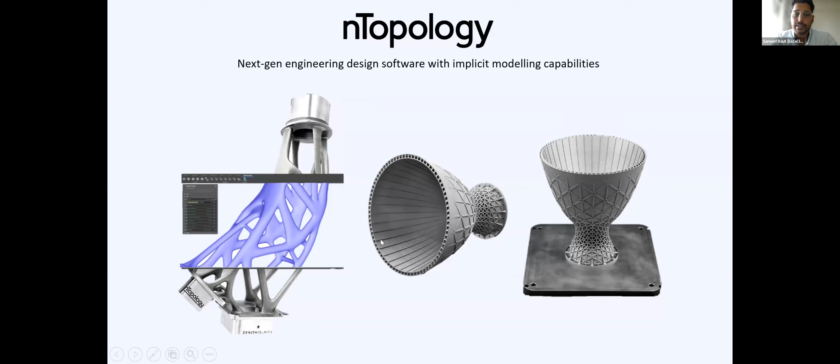Now let's jump into nTopology, which is today's topic. There was a reason for Excel3D to partner with nTopology, because we have selected a few technologies. We understood what nTopology's power is. It's a next generation engineering design software. And it is different from the current B-rep software because it works with implicit modeling capabilities. So the things which are difficult to achieve with CAD software are really controllable and very easily achievable with nTopology. We're going to see the demo of the software as well today, but I'll give you a quick glance of what nTopology is and where it has come from.

nTopology started in 2015, and they launched a platform called Element in 2016. And that's where they saw a huge potential. I've been following nTopology since 2016, when they were in the startup zone at Formnext in Germany. And from there, they have grown really drastically, with a platform today which is funded by really good companies backing nTopology. Brad is the founder of nTopology, a very good friend. And if you see the industry veterans who are from SpaceClaim or from Autodesk, whoever was in the CAD domain, they are supporting nTopology because it is something new and it is the future of how design can be made.

The mission of nTopology is to empower engineering teams to design transformative products. There are softwares in the market which can do such designs. We have seen so many parts like this, topology optimization, implants, but the way you can control it with nTopology is something which is not achievable by any other software. So these are some examples shown here as images, which are good studies.

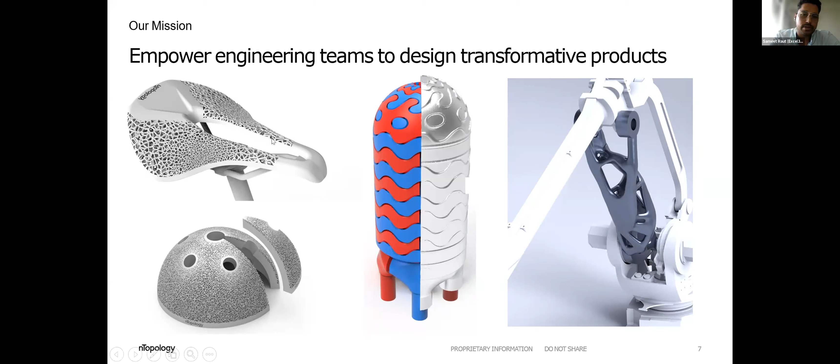Now, we all know about traditional manufacturing. 30, 40 years ago, we had traditional manufacturing, but in the last 2 decades, there was a need for something new, which is what we call additive manufacturing today. You look at computers, we had old computers, then traditional computers, and now we have multi-core GPU computers. But in traditional design software, there was a loophole. No one thought about doing something different. Everyone stuck to B-rep, but nTopology came as a platform and started thinking differently about how they can do things, and they started working with implicit modeling.

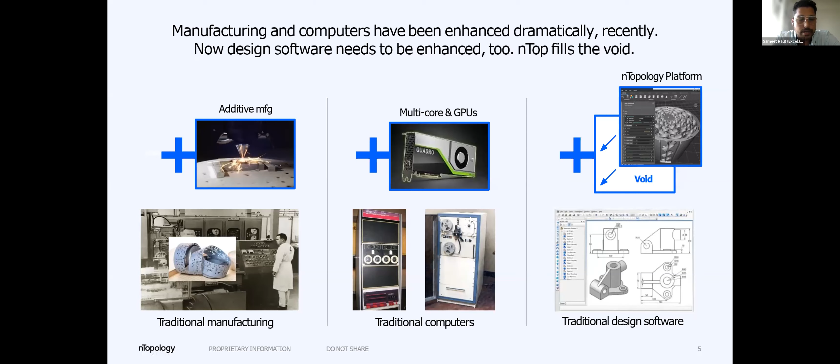Now, just a quick slide on helping you understand what an implicit model is. So you have traditional CAD software which shows boundary representations. We call it BREP, right? So you have surfaces, and a topology is actually welding those surfaces together, assuming objects are created as if they are homogeneous. And that is where we have a need for data preparation software before we go to 3D printing, to make watertight STL files for printing.

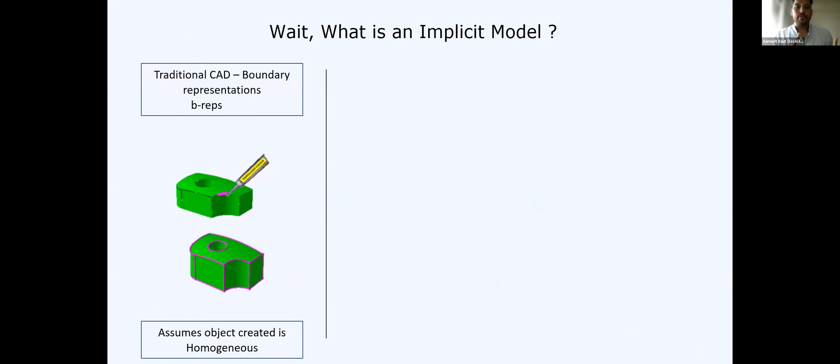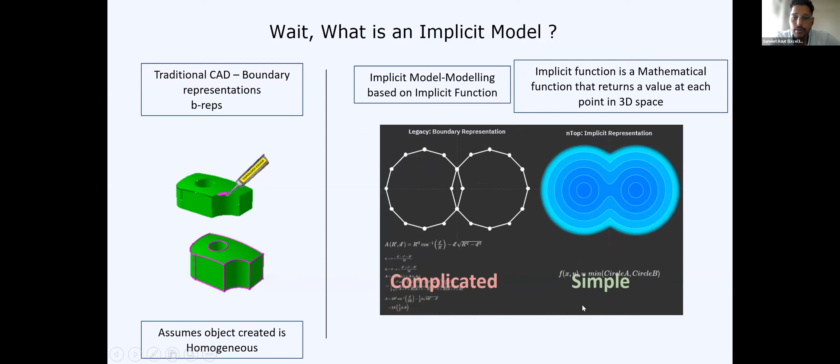And on the other side, you have the implicit modeling function in nTopology. In boundary rep, you have a sphere, it has a certain equation. With implicit representation, you also have a certain equation. An implicit function is the mathematical function which gives you the exact value of that point in the whole 3D space. Now, things become quite difficult when we do operations like a Boolean unite of these two spheres. The equations get really complicated, but it becomes much simpler and straightforward when we work with implicit representation.

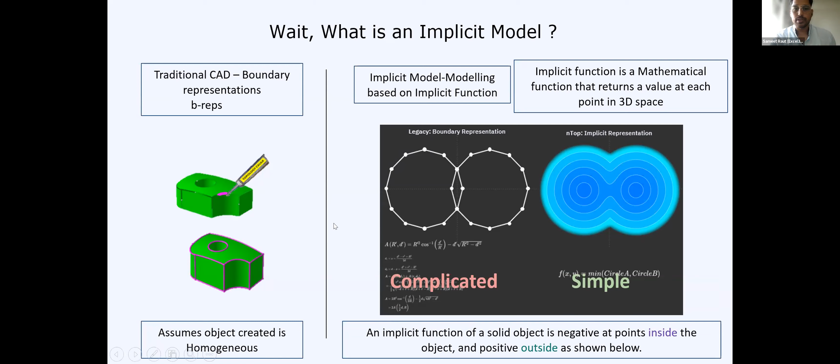So just on a theoretical note, for an implicit function of a solid object in 3D space, if the point gives a negative value, it is inside the object. If the point is outside the body, it gives you a positive value. And if it's on the body, it gives you 0. This way, you can have good control over your design, and that's where it gives you the benefit of using nTopology as an implicit model function.

So the workflow is something which might be new to a lot of people. nTopology does not work the way these CAD BREP softwares work; it has boxes which you select, and there's a workflow. That workflow you can save, and if you have a similar kind of geometry and apply a similar kind of application to it, you just have to import it and the whole workflow runs automatically to give you the part out. I think Praneeth is going to show you some of our workflows after me.

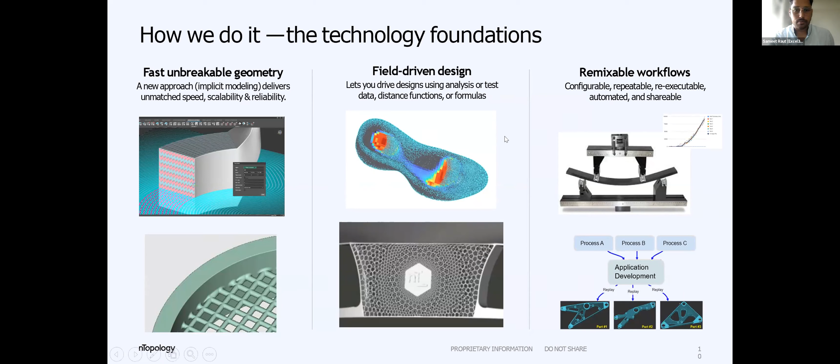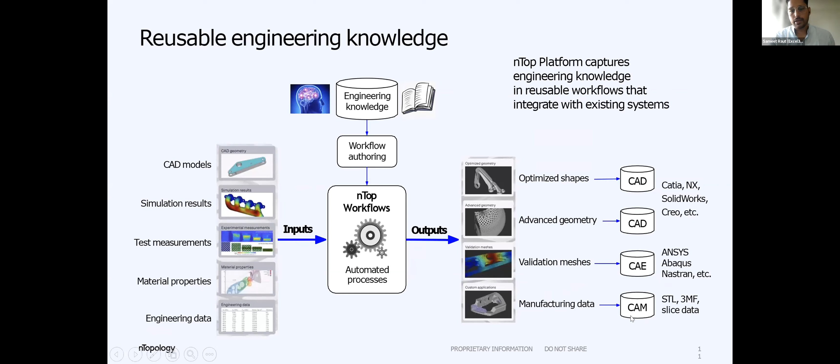Now, how does nTopology do this? It can take CAD models, simulation results, test measurements, material properties, and we apply our engineering knowledge through workflows inside nTopology, and we can get outputs like optimized shapes, advanced geometries, validation meshes, manufacturing data. So we can go from CAD to CAD, CAD to CAE, CAD to CAM as well. A lot of people ask what file formats. This slide shows what file formats can be imported from CAD, and you see we can get back to STEP and Parasolid from nTopology again, and also slice data.

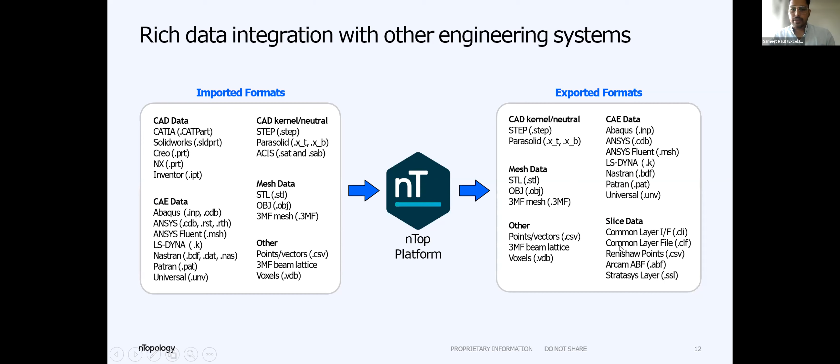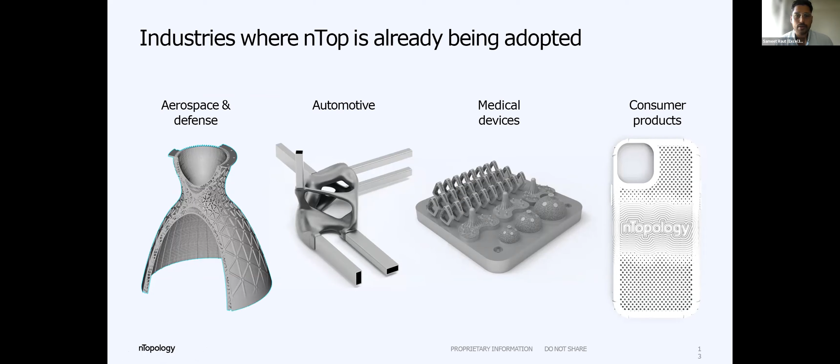Most of the industries that have adopted nTopology are aerospace and defense, automotive, medical, and consumer products. We've been partnered with nTopology for more than a year, and we have very good success stories in India, right from aerospace. Medical has shown really good successes, and we have supported a good number of medical companies on the implant design side, and automotive companies, and also service bureaus.

Application wise, today we are going to talk about how we can do topology optimization and use it. We have a use case study where we created the part, and Praneeth is going to share the whole journey. But application wise, we can do structural lightweighting, part consolidation, material reductions. We have architected materials, lattices and textures, which are easily done, and pattern making, texturing on consumer products, or even design automation.

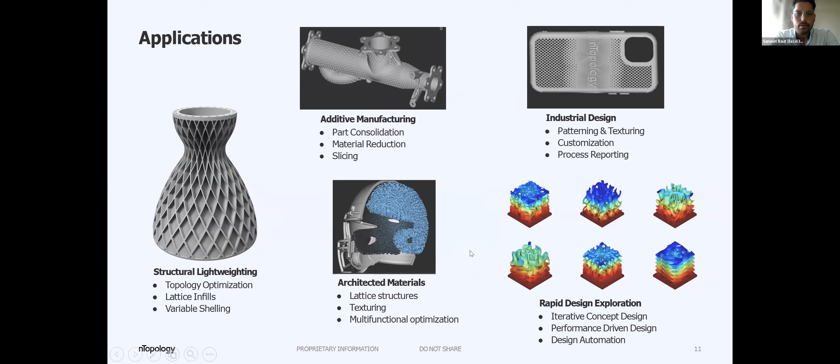Some examples: when you work on the additive manufacturing side, data becomes one of the biggest challenges, especially in the medical domain. So nTopology takes any CAD format or any STL, whatever format you put in, converts that into an implicit model, performs the operations we tell it to do, and at the end you can export it whichever way. Even if you export an STL from nTopology, it does not have to be in GBs. It could be less than 1 GB as well. We have done a lot of testing on it.

So it helps you create smaller file sizes. Also, take the example of a heat exchanger. This is one of the very good success stories for nTopology, where these designs are really difficult to make with any conventional CAD software, but with nTopology it becomes much easier, and these actually give a very good amount of performance.

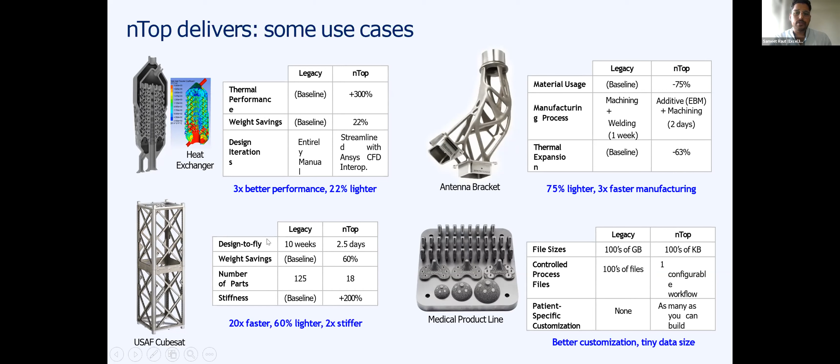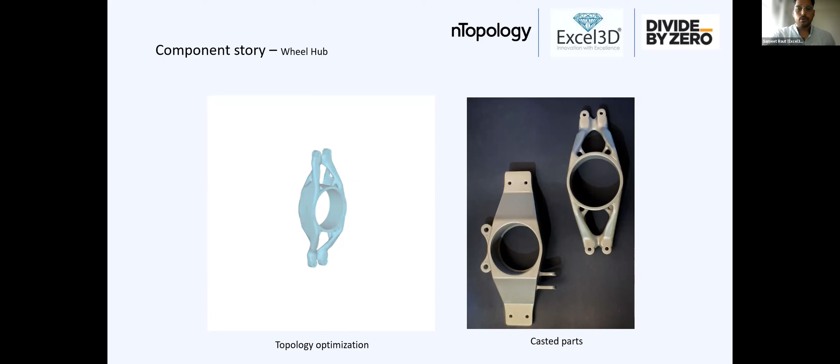Like it gives a good performance as well. And if you see all this, the 20x faster, 60% lighter, it's all the advantages we see with nTopology. So coming to today's point, we have this complete story of a wheel hub, wherein we started with an original design here, which is cast parts, but with nTopology we could make the part not over-engineered, much lighter and much more efficient. This is a case study we did for one of the student Formula 1 cars.

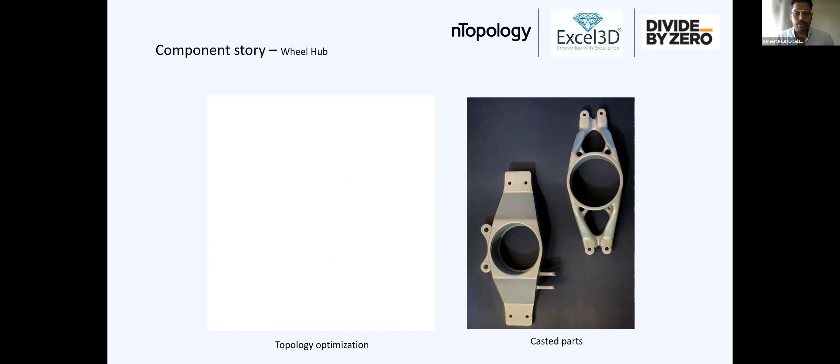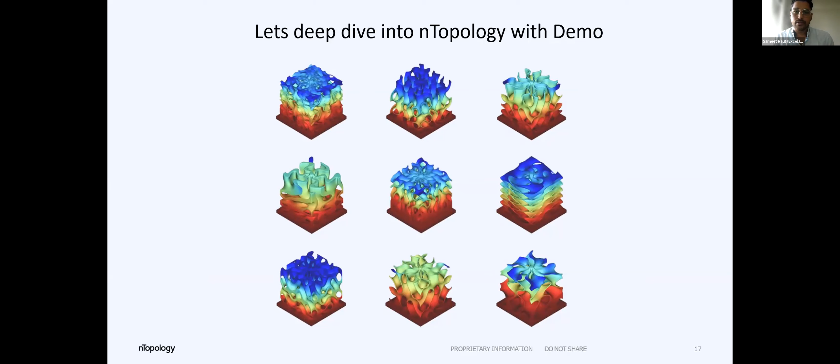So let's see how that whole story is. From my side, I have been theoretically talking about nTopology, what it is. I will hand it over to Praneeth, who will give you a quick demo about this part, from how it started and how it ended. And after that is going to be Swapnil, who will be talking more on the manufacturing and 3D printing side, how he made it, the patterns, and how the casting has been done. We'll take the questions at the end. So I will hand it over to Praneeth now.

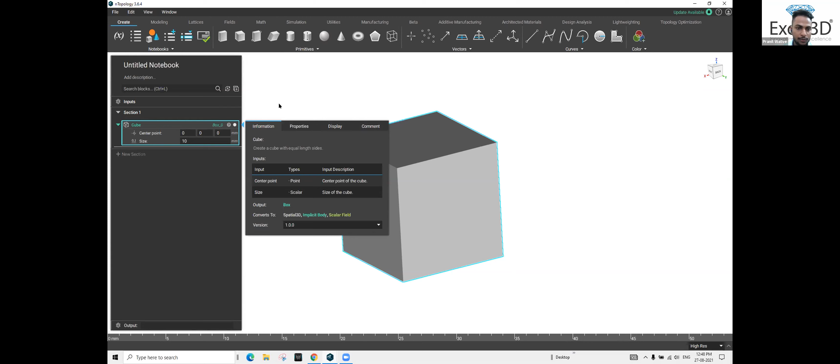And this is the block I was talking about: each and every feature has a block, and the question mark defines what the properties are and gives us a brief about everything. There's a comment box where you can add your comments, so you can share this workflow with any of your colleagues, and we can get any information we need, like what the inputs are and what they mean, and you can change it to any dimension you need. So that's how easy it is.

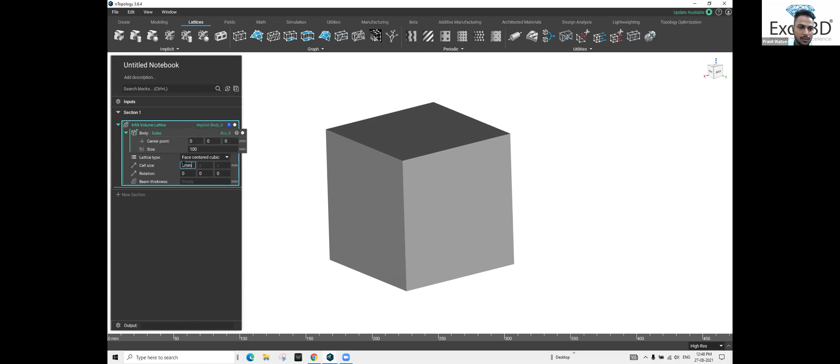And once you are familiar with this block system, you can search any block here by name, like a cube, so I can find a cube here too. I will show how easy and fast it is to create a lattice too. I have an infill lattice. So that's an infill volume lattice, and I just drag in the body on which I need the lattice, what type of lattice I need, and bring in my input. So in a fraction of a second, my lattice has been created.

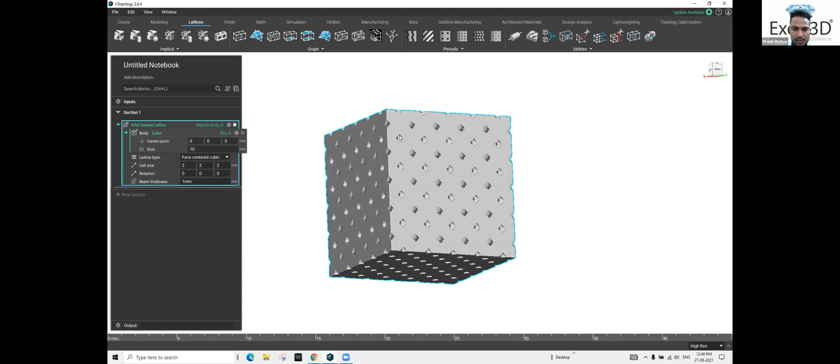So as you can see, the section view of it. And we can also see how much time it took, just 173 milliseconds to create such a complex lattice. So that's how the process in nTopology is, and it helps us organize properly.

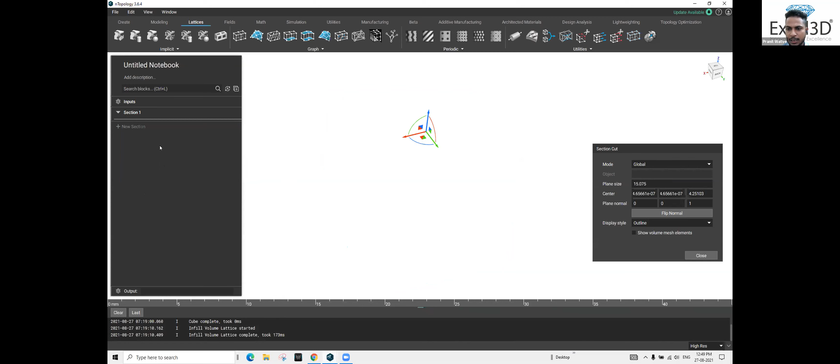So before moving towards the whole topology workflow, can we have a poll, Shama? Yeah. The poll question, please. And we had a really interesting question on the chat box. Thank you. Sorry. The poll question, yeah.

Which of these features are most helpful for part making in the current casting process? TopOpt for manufacturing, automated geometric reconstruction, design for additive manufacturing, and end-to-end optimization with reusable processes. We almost have a tie between TopOpt and end-to-end optimization with reusable processes. But I think topology optimization is a win-win. We are totally focusing on that today, so you're at the right place. Thank you for your valuable opinion. You can carry on, Pranit.

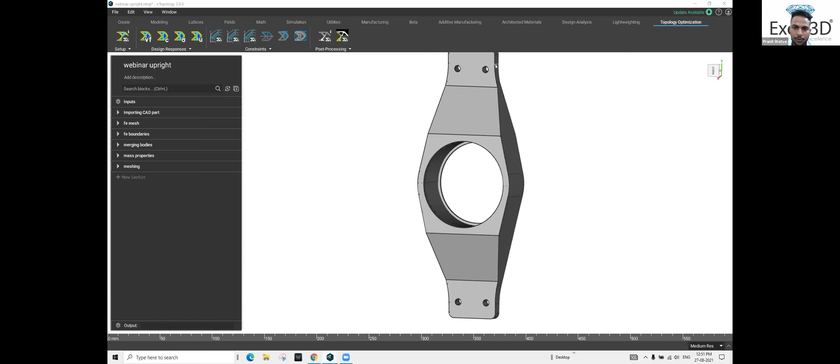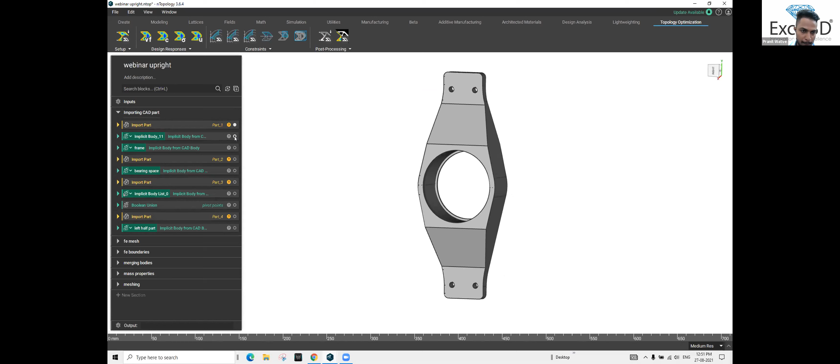So before moving forward, as I showed the whole workflow, you can see how I have organized it, and it's very easy for me to have each section. This is how I have divided my plan of action. The first thing I'm doing is importing my part. As you can see, we can import any kind of parts. There's a list of CAD formats we can import into nTopology, and for STL there's an STL import. This part was already designed, so I have imported it.

You can recognize there are faces and edges in this CAD part. So to work on any CAD part, we need to just convert it into an nTopology format. That is implicit modeling, and it's easy to convert.

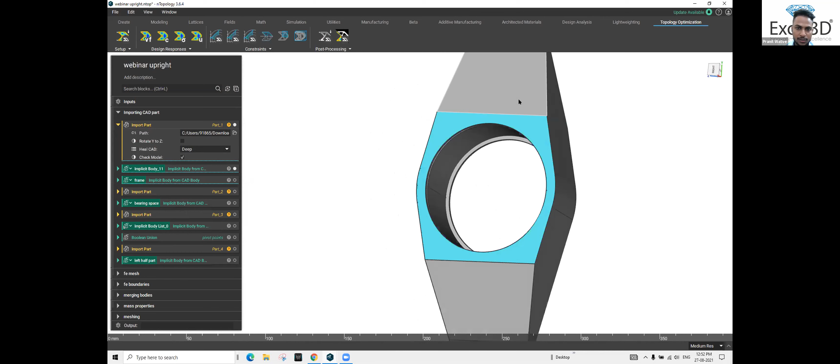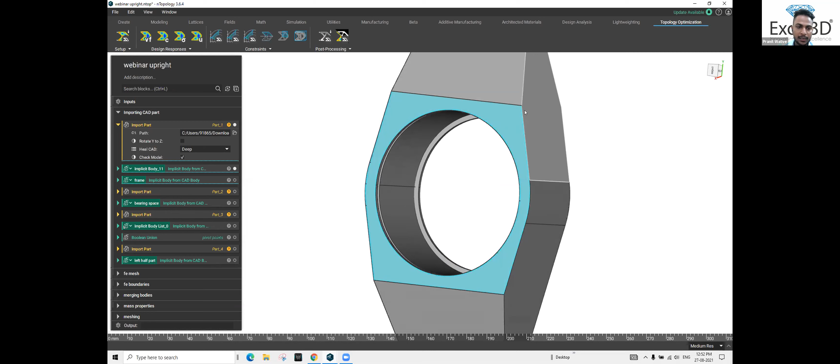But in the case of nTopology, where it converts into implicit modeling, it gives us the ease to, as you can see, the whole body is now a single body, and we don't have any faces or any edges or any constraints to design it. So once that is done, we have converted the whole body into implicit modeling, and now we are ready to go. There are some pre-process steps where we need to just identify what we need.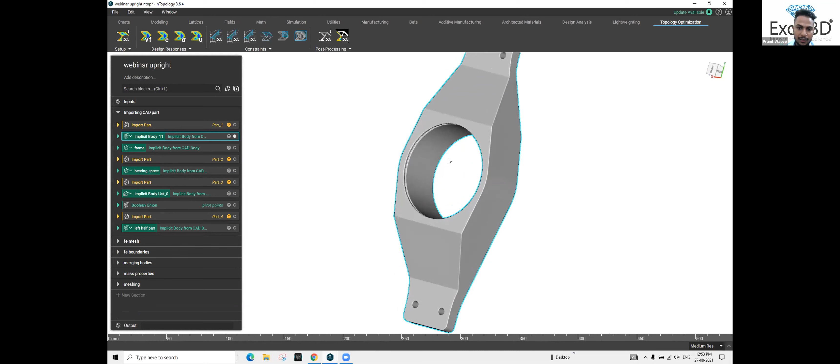Currently, as I said, we are doing a topology optimization. We need to reduce this part. So why reduce this part? This is an FSAE racing car part, and since race cars need to be lighter without compromising overall strength, we need to reduce some material from this. I will also show at the end how much material we have reduced and what we have achieved doing this.

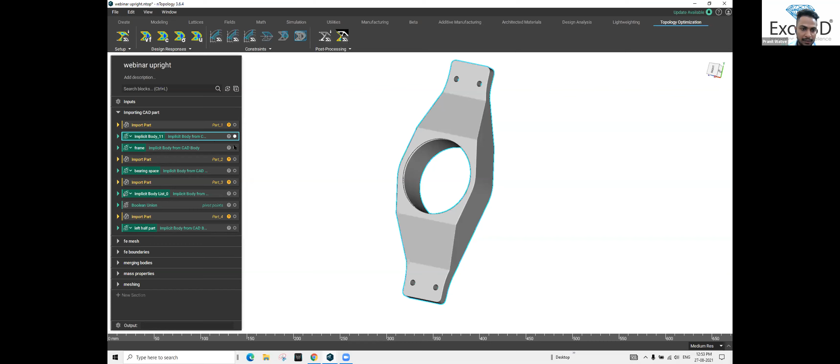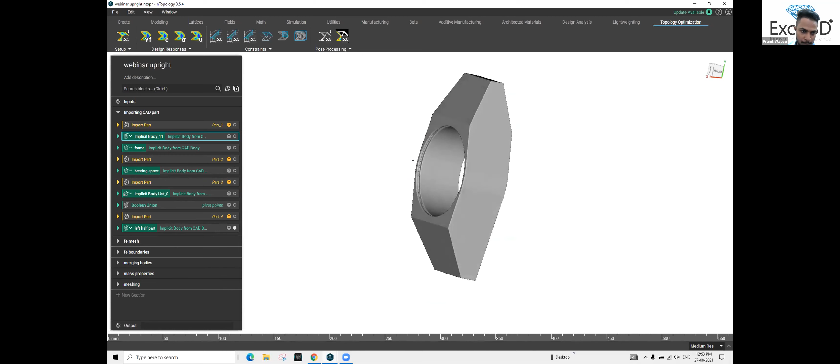So once that is done, we separate out the parts. This is the main frame, then this is the bearing space where the bearing will be. I won't be altering this, so I segregate this first. Once that is done, this is the part on which we need to apply the topology optimization, as these are the points which will have the wishbones over it. We don't need to alter it, so I'm segregating it separately, so the topology optimization won't hamper the holes.

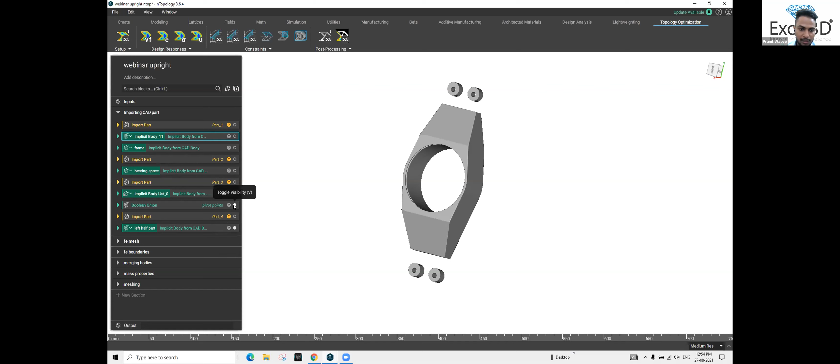So once that is done, we classify our needs according to our simulations. We continue with the normal FE analysis. We have an FE model.

Pranit, does it take time to load? Just a minute. It might take a bit to restart. Okay. Meanwhile, while Pranit loads his screen, there's been a technical issue. Can we carry on with Swapnil, and once Pranit is ready, we can get back to the software part? Yeah, I don't think it's going to take much time, Isha, because the workflow would be disturbed. Just 2 minutes. Let's see. Wait for 2 minutes. Okay.

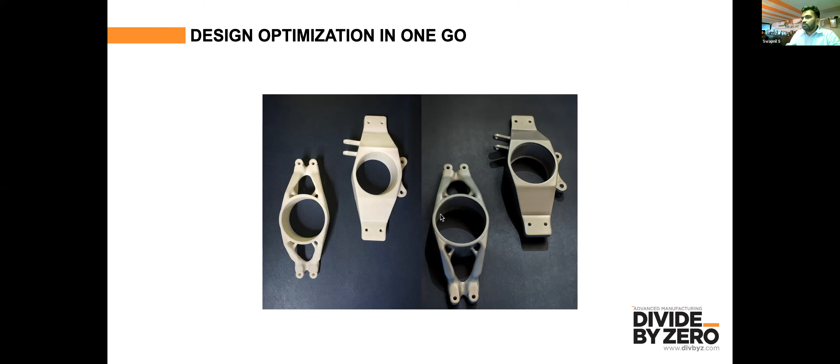But particularly with today's example here, we approached this with the investment casting method. Traditionally this component could have weighed around 882 grams with an aluminum LM4 kind of grade, and with the nTop output, this is weighing around 435, so almost up to 50% weight reduction here. I think Pranit will take this up later on, but it's a huge material and cost saving for sure, and how it can be used with traditional 3D printers and made really affordable and quick. We're going to talk about that.

So in terms of low volume casting patterns, we had this poll, and we have a lot of issues in terms of long production time from vendors, a longer design validation process, higher cost of production, and samples not being available for client or internal team meetings. These kinds of issues are going on with the team, and we've seen this happening.

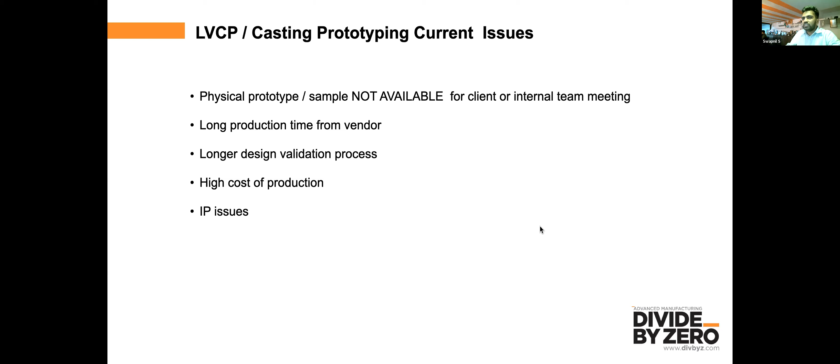Typically, these kinds of casting patterns can be made with 3 technologies. You have injection molding, wherein you pour wax into a mold and make these patterns, or you CNC these patterns through either wax or metal in the case of sand casting patterns, or you 3D print either patterns or cores. All these 3 technologies are there for manufacturing these kinds of patterns.

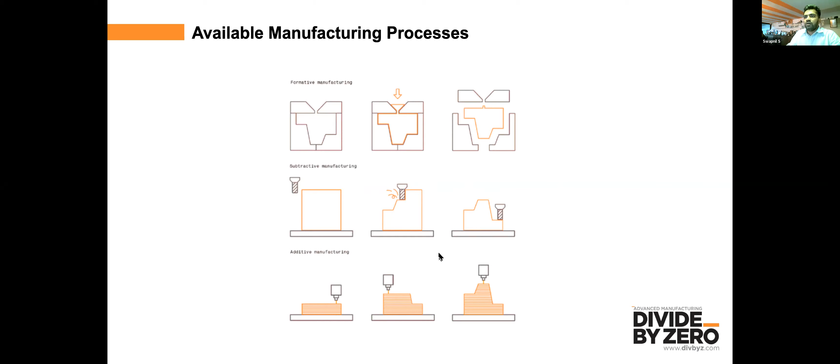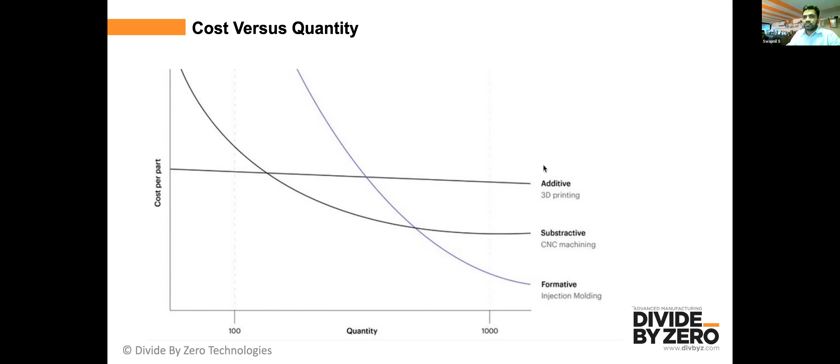So, in terms of casting patterns, in-house CNC manufacturing versus in-house 3D printing, take this kind of pattern which is already topology optimized. CNC machining this pattern takes around 20 hours because you have a lot of undercuts and a lot of tooling required. You're switching tools continuously, and you need stock of a particular shape and size. With 3D printing, this is going to take 10 hours at much less cost. There is huge time and cost saving. I'm just walking you through the reason behind it.

I hope my video is not lagging. Let's see. Okay.

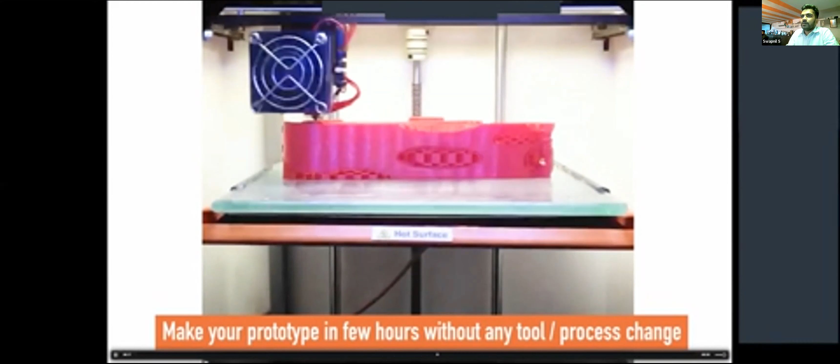So basically, this is the component where you can see there are a lot of undercuts. This is again optimized, and this is 3D printing being done on one of our basic machines. This is a time-lapsed, very fast running video. Optimizing something like this is very easy on nTop, and the manufacturing side can be done with 3D printing. As I said, you don't need any tool change here, and you don't need any fixtures when you're running this on a 3D printer.

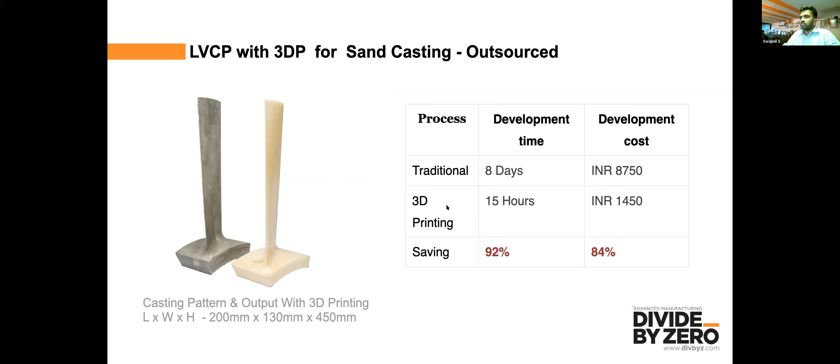Similarly with sand casting patterns as well, we've been doing this. We've helped one of our customers who works for Indian Railways; they had different types of impeller blades to be tested for different angles, and for them there was huge time and cost saving, because getting a pattern in a few hours was very important for them.

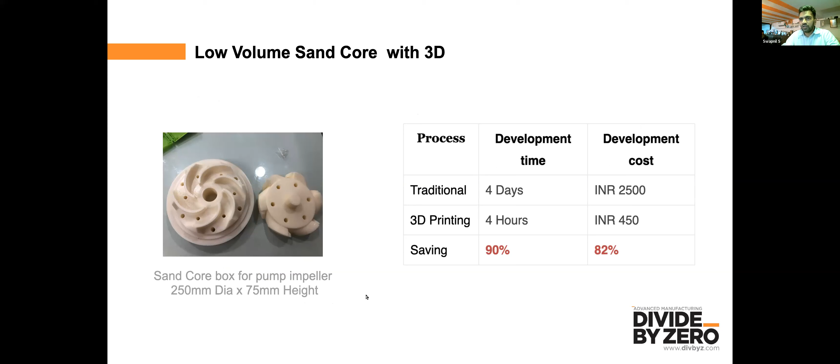Not only that, but we have also worked on core box manufacturing. When we talk about sand core box manufacturing, sand cores are required when you have complex geometries such as impellers. And with topology optimized parts, when they are complex, we can also use this methodology, wherein with a special blend of polymer that our machines can print, we can develop these sand core boxes for the cold box, amine core box method, and shoot these sand cores out of the standard amine core shooter available in the industry. And we have actually worked this out.

And at least generate 200 to 300. So this was a sand core box pump impeller of around 250 mm diameter, and this is something which is possible. We've been running this through, and again, this is very, very cost effective compared to traditional sand core 3D printing.

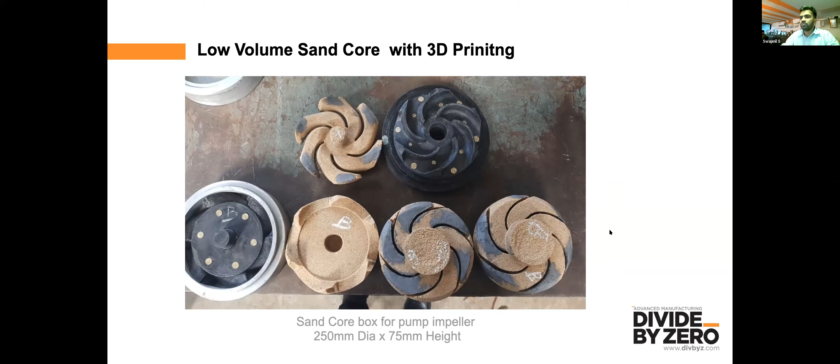Not only that, with TopOpt and 3D printing, you can run different design iterations. You can print all those in one go and then just finalize the one, fit, test and run through. The kind of speed that this combination offers you is basically unmatchable, because the problem with 3D printing was cost or timeline, which we have reduced.

The problem with design optimization was that the process was longer, and many times, because the process is tedious, many NPD design houses choose to settle in between. Here it's possible for them to jump to something which is better optimized and better manufactured, which has a lot of time and cost saving. So that is the power here.

Typical investment casting process, wherein you have injection or wax molding. So how did we actually go from this pattern here to this kind of an output with the aluminum? Investment casting was typically standard. You have molds to make these patterns, and wax patterns are made out of these molds. Pattern assembly is done. You have slurry coating, you have stucco coating, and then you have the complete mold.

Then in the autoclave you melt out the pattern, and the heat melts away this wax or plastic, and then you have pouring, then shake out or break out, and then you have castings which are reduced and finished.

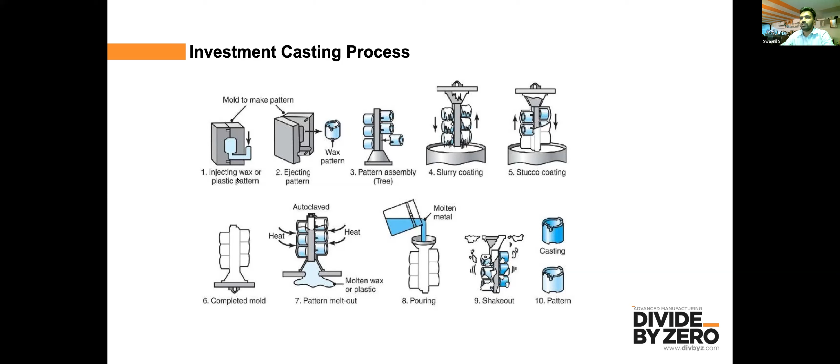But in terms of 3D printed patterns, the process is similar. You 3D print the pattern, you do the assembly on the tree with wax as the attachment agent. Then you have shell building, which is slurry and stucco coating again. And then you do dewaxing and burnout.

So when you're doing a polymer based 3D printed component for investment casting, you do the burnouts, and you can also use chemical based dewaxing as required, and you have to run at least 2 to 3 different rounds of coating, shell building and dewaxing together. And then after chemical based dewax, just to ensure there is nothing left inside, we do gravity pouring and then knockout and finishing.

Also, with the special polymer blend that we have, our ash content on the investment casting part is less than 1%, which we have achieved. We've been working in this field with many customers, and this is possible.

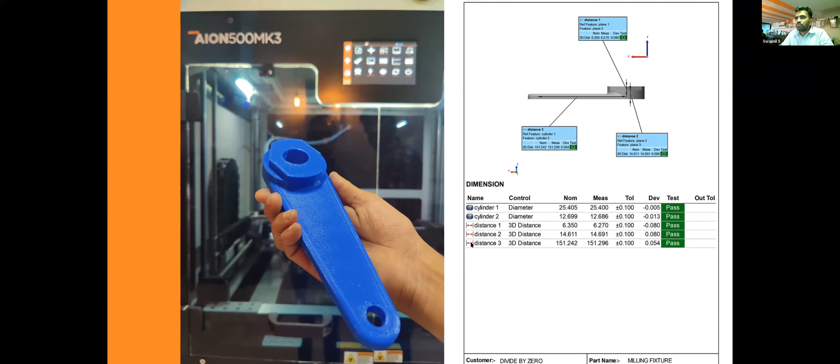Not only that, we've been working with the latest high-speed 3D printers. We were working on FDM or FFF technology, filament-based, and we're now also working with laser sintering. One of the reasons we still stick to FFF or FDM technology is because it is pretty affordable. But we are now able to run high-speed machines which can print up to 10 times faster than traditional FDM machines, and also deliver accurate components with great surface finish.

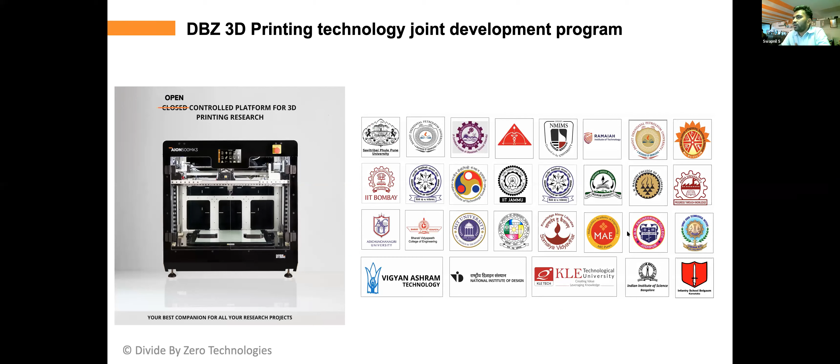These are some of our customers, and I can see some of you are already here, so thank you for being here. These are some of our technology partners for the joint development programs that we run. All that we have delivered or developed would not have been possible without the academia support that we have for research. I'll come back to this, but over to you, Pranit.

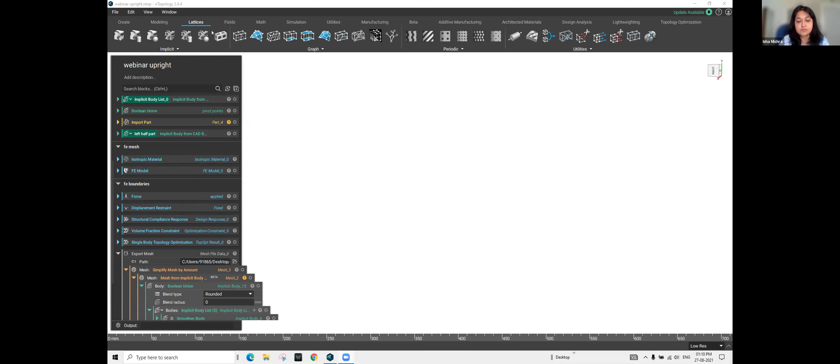Hello. Yeah, can you? Yes, we can hear you. Yeah, I can't share my screen. Full visible. Can you try now, Praneeth? Yeah, yeah. Yeah, now it's possible. Thank you. I hope my screen... We can see you. Yeah, sorry for that technical glitch.

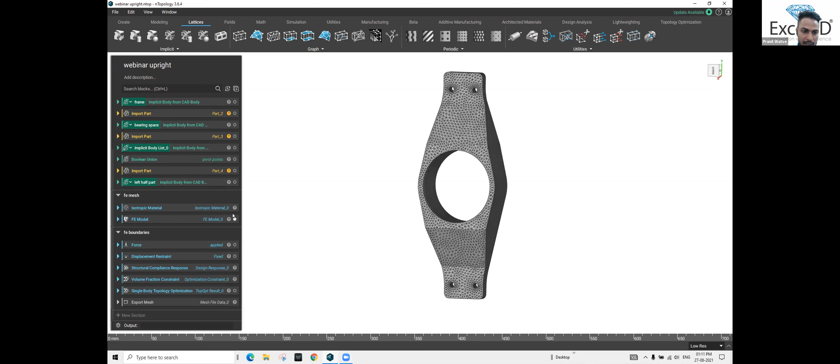So just after importing our body and segregating the body on which we should apply the nTopology or topology optimization, we just have a normal FE analysis based on that FE mesh. Then we provide the forces based on our calculations, the race car calculations which we have. Then what should be the fixed constraints and where the forces should be applied.

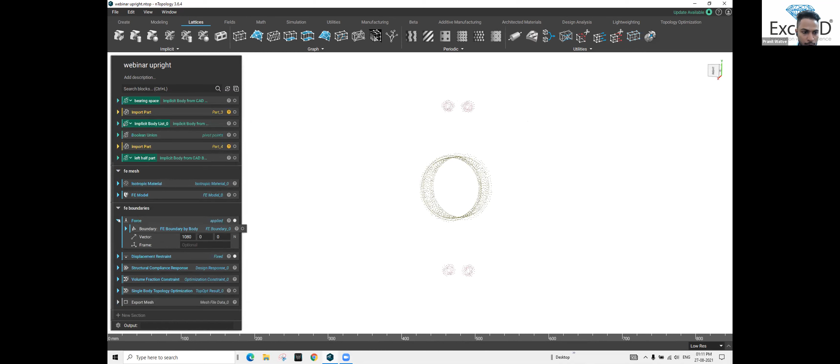So after giving these inputs to the blocks, we then have the structural compliance, and then nTopology provides us a totally topology optimized part. And as you can see, it's a bit rough, so we can have control over it depending on a threshold and also on the iterations. We can also have control based on the volume fraction. Currently I have given 0.35, so you can alter it.

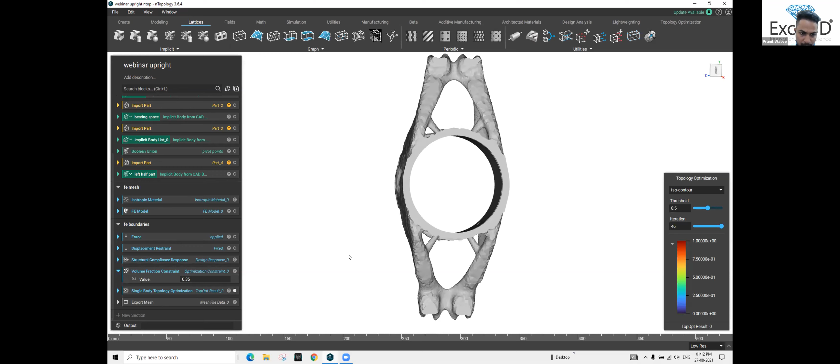So we are focusing totally on the volume fraction constraint, so you can change it and have your own based on your need. It gives various degrees of freedom to control your geometry itself. And once that is done, this is some rough kind of a body. So nTopology converts your body into a smoothened body, and that's how the smoothened body is.

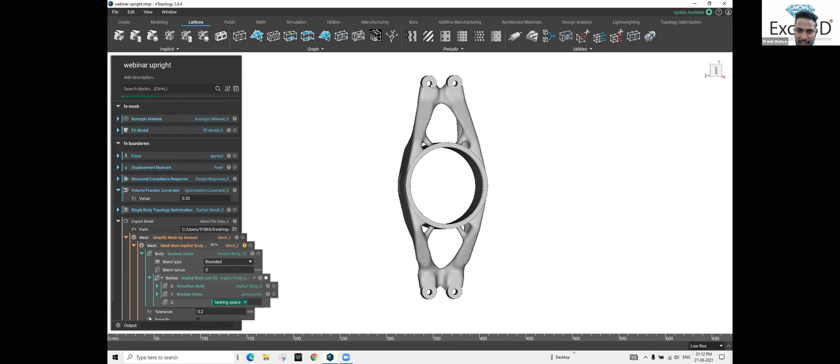And now we union it with the whole set of constraints like the pivot points and the bearing space. And once that is done, our part is ready. So after our part is ready, we need to manufacture it, or we can take it to another level to optimize, or we can have FE analysis in another software. So we can export it into any format. We convert it into a mesh.

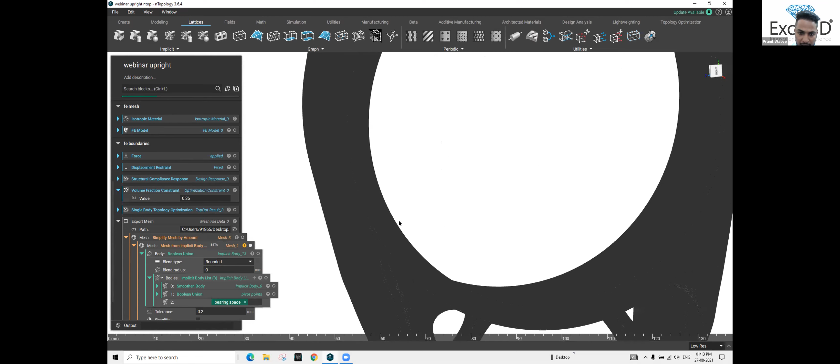So you can see how defined the mesh is, what type of mesh it is, and the properties, how many faces we have. Currently this mesh must be heavy. So nTopology has a feature to simplify, as Samir sir had mentioned. We can have control over the size of the mesh and simplify it by an amount. It won't alter or harm your design. It would just reduce the face count and keep a proper amount.

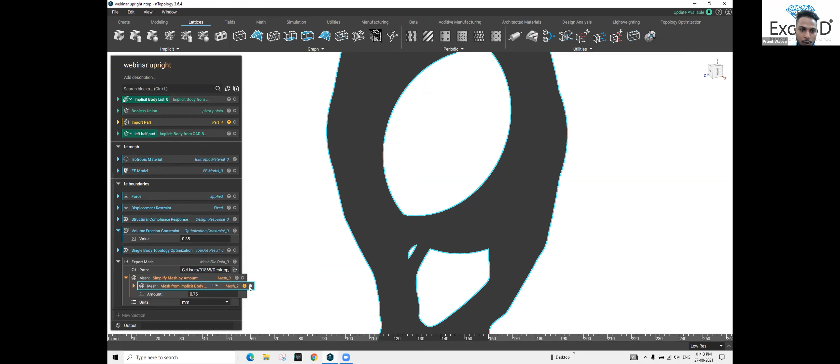Praneeth, are you there? Internet issue. Yeah, I think he has a net issue. Has it been raining badly in Bombay? Not really.

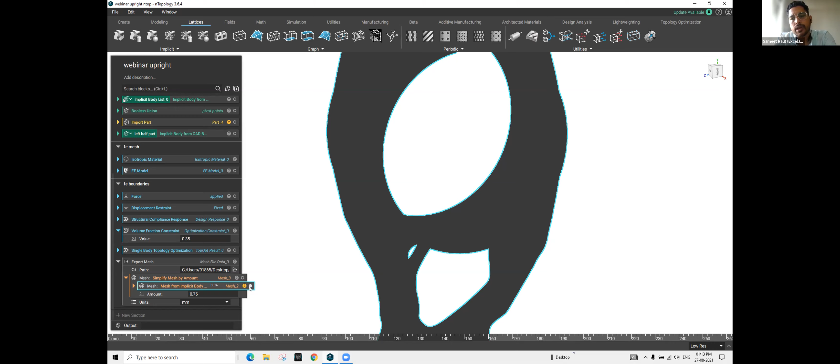Anyways, I think that was the last part where we are showing the mesh, and from the mesh you can actually export it as an STL, or take it back to the CAD, or do slicing on it and directly print it. So once this was done, the STLs were printed by Swapnil, and then we did the whole casting of the part. The only thing I am missing, Swapnil, do you have the numbers on how much the weight reduction was?